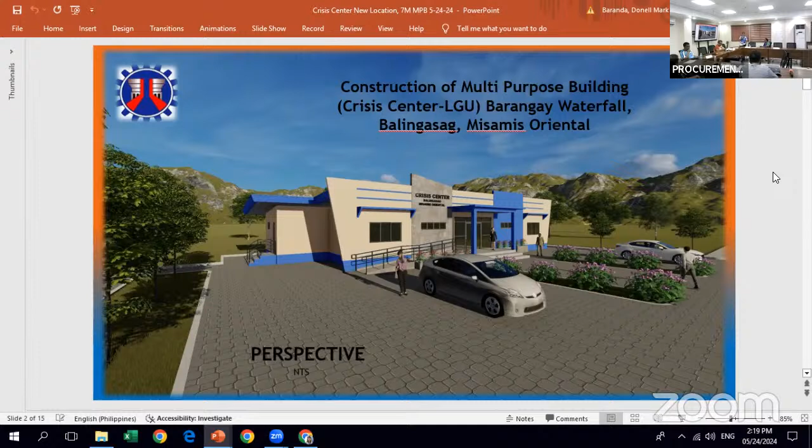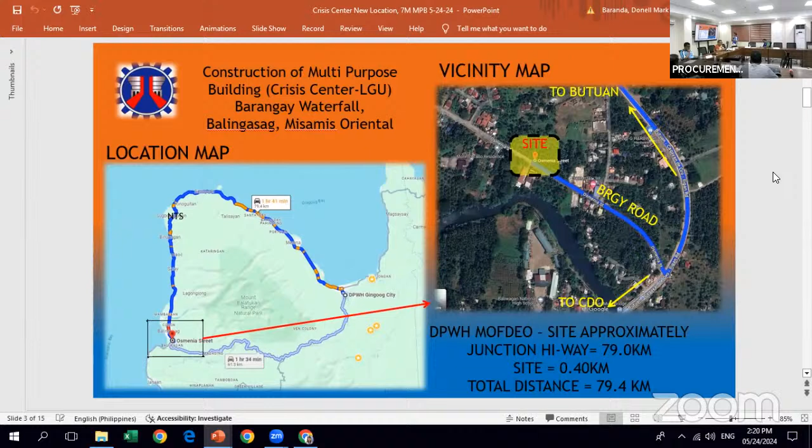From the perspective of our project, this is the location. Going to Butuan, it's on the left side. Going to CDO, it's on the right side. This is our site development plan.

This is the exact site location, near the motor pool. This picture shows the site location.

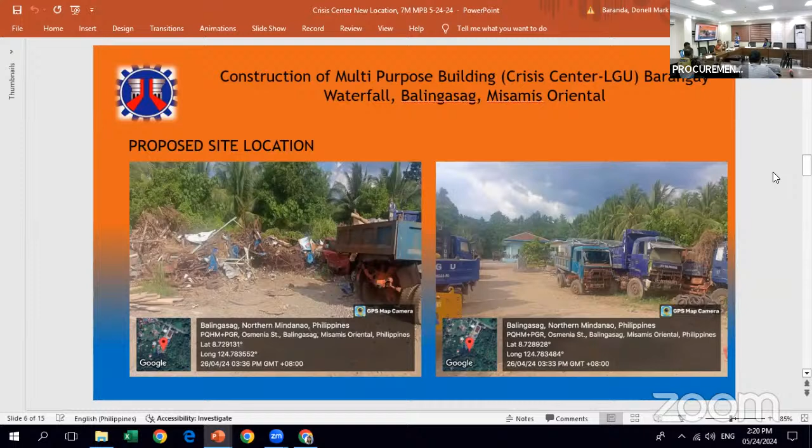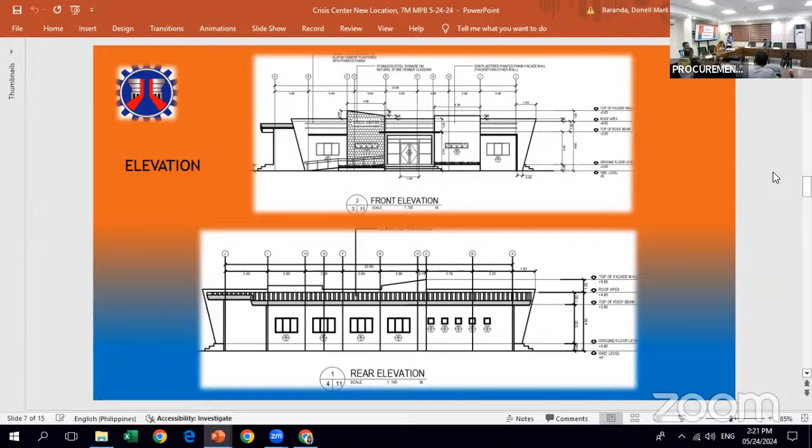Next, the front elevation and rear elevation. This is a one-story multi-purpose crisis center. Next, we have the side elevation.

For the floor plan, 23 meters long and 10 meters wide. This is the floor plan.

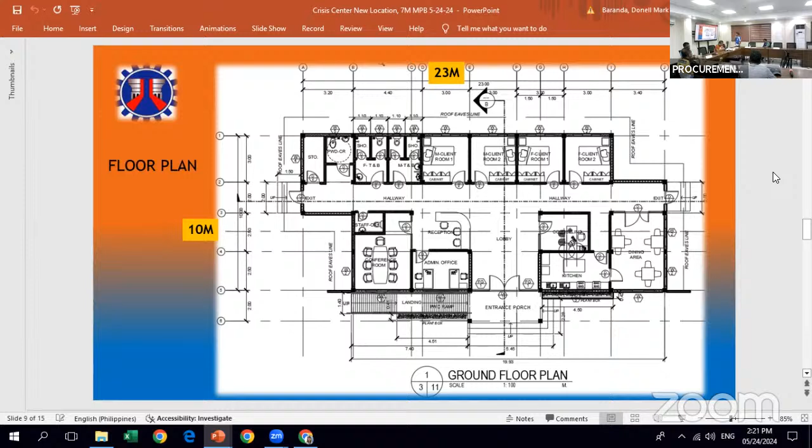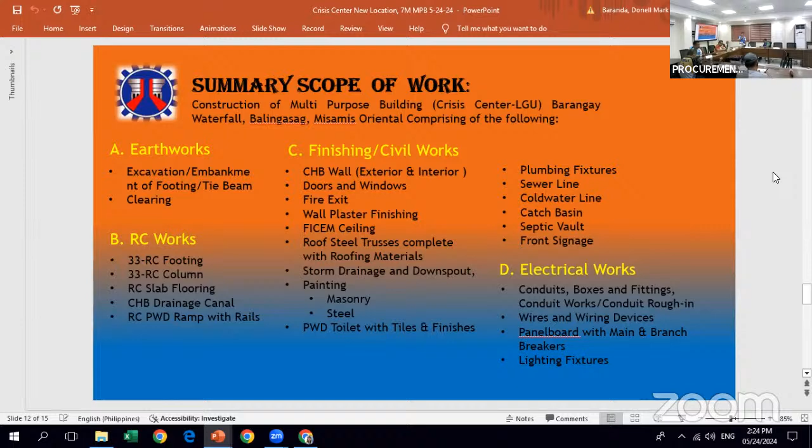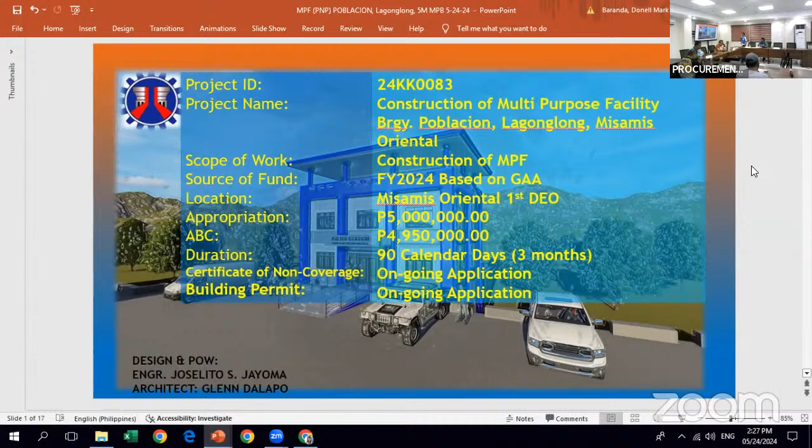Okay, we proceed to the next project, ID 24KK0083. Construction of multi-purpose facility, Barangay Poblacion, Lagonglong, Misamis Oriental. Source of fund is FY 2024, location Misamis Oriental first district engineering office. Appropriation is 5 million, ABC approved budget for the contract is 4,950,000. Duration 90 calendar days or 3 months. Certificate of non-coverage ongoing application, likewise our building permit.

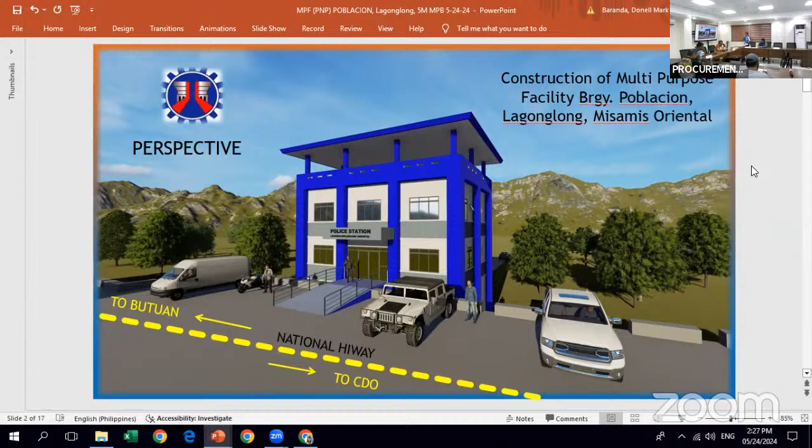So this is the perspective multi-purpose facility, Poblacion, Lagonglong, Misamis Oriental. This is the location. Going to Butuan, it's on the right side. Going to CDO, it's on the left side.

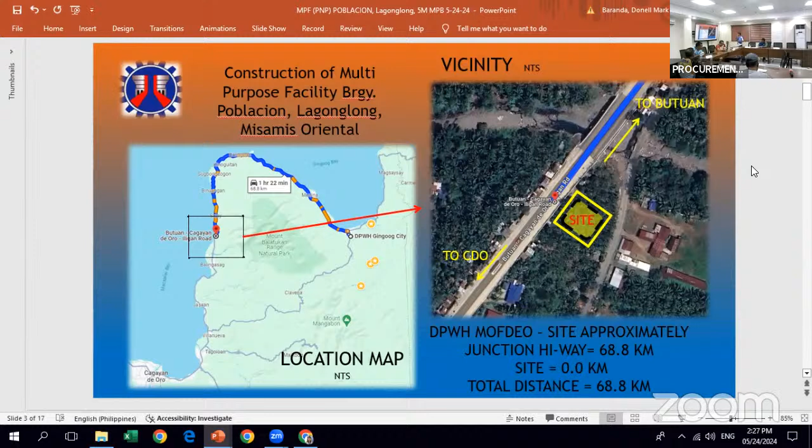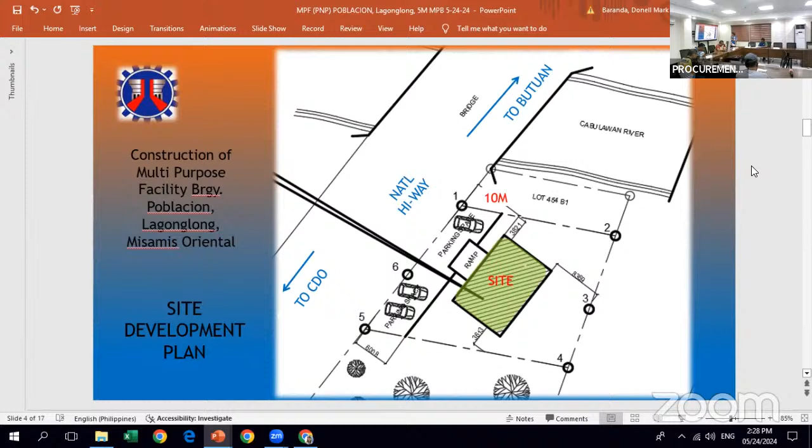So this is the site development plan. Basically our building has a setback of 10 meters from the riprap, the existing riprap. This is the site, and this is the riprap. So the site, from the riprap, has an offset of 10 meters.

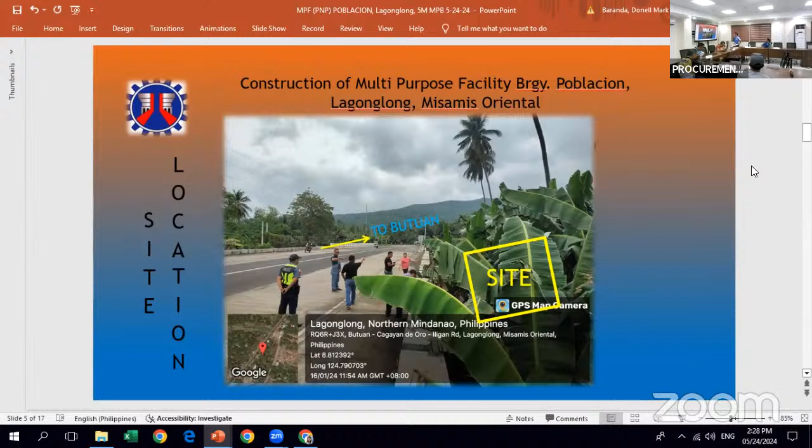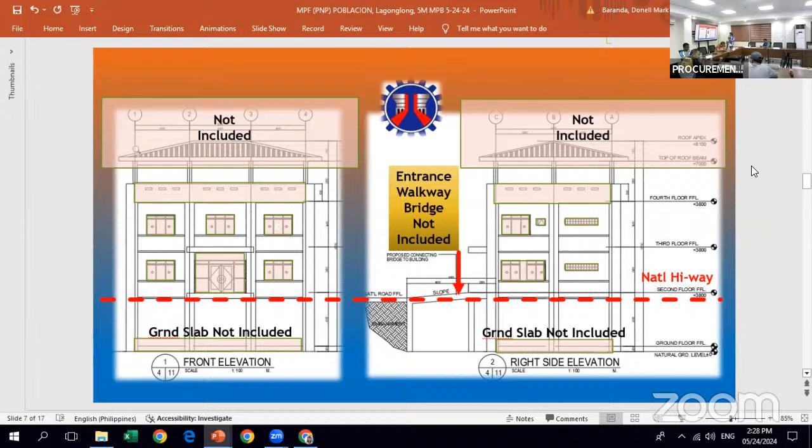For the elevation, as you can see, what's not included in our budget is the roofing. The entrance bridge is also not in the budget.

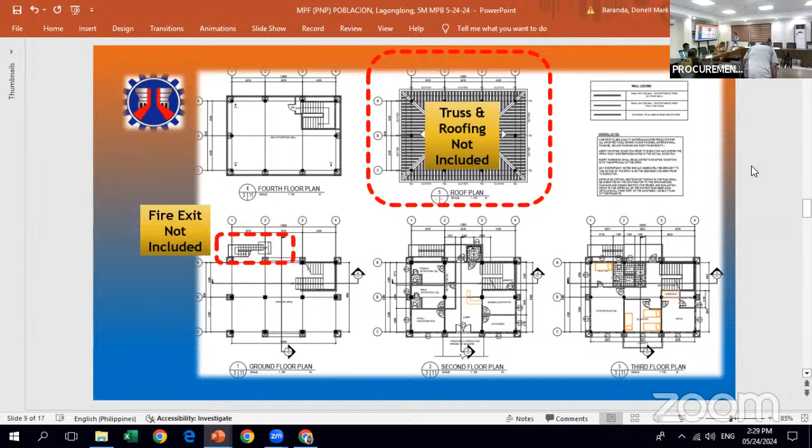Again, our floor plan, ground floor. The exit is also not included in our budget estimate. So for the second floor, third floor, up to third floor, it's covered.

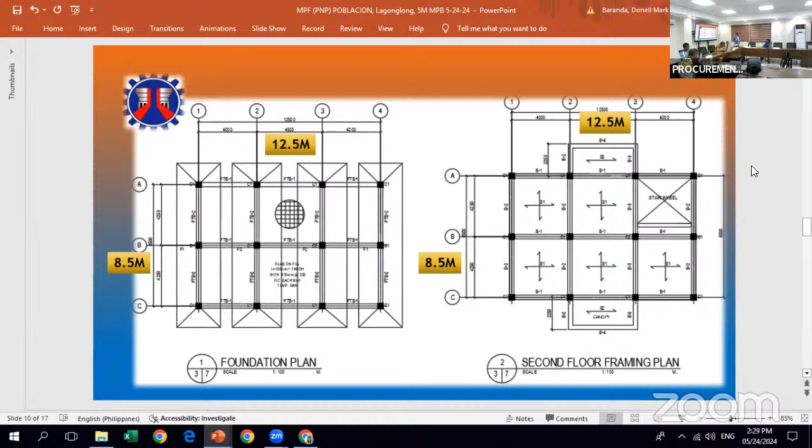So the building is 12.5 meters long and 8.5 meters wide, with 4 floors: ground floor, second floor, third floor, and fourth floor.

For the bill of quantities: provision of field office for the engineer on rental basis, permits, clearances, project billboards, occupational safety and health, mobilization and demobilization, general scaffolding, shoring and netting, structural excavation, gravel fill. For structural concrete, we have 3,000 PSI and 4,000 PSI, Class A, 28 days.

Reinforcing steel, deformed bar grade 40 and grade 60. Formworks and falseworks. We also have catch basin, sewer lines, storm drainage and downspout, septic vault, concrete CHB, plumbing fixtures for water lines, and for the ceiling, 4.5mm metal frame, 5mm cement board.

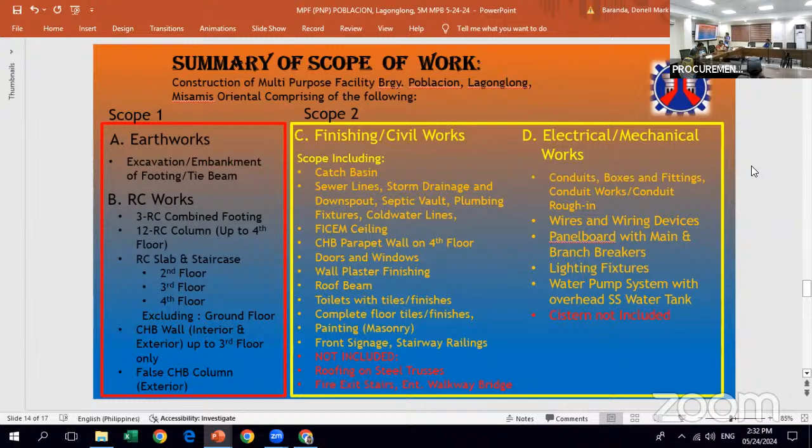So basically, the summary of the scope of work: our coverage is mainly scope 2, which is within the 5 million budget. Scope 1 was already allotted, also starting at 5 million, for a total of 10 million for one building. For scope 2, the coverage is mostly finishing, civil works, and electrical or mechanical work. So what's not included is the roofing, steel trusses, the fire exit stairs, or the entrance walkway bridge. The cistern is also not covered.

Minimum requirements: we have backhoe, dump truck, water truck, and truck-mounted crane. For minor equipment: chainsaw, plate compactor, jackhammer, one-bagger mixer, concrete vibrator, bar cutter, bar bender, cutting outfit, welding machine, and cut-off machine, for a total of 14 equipment.

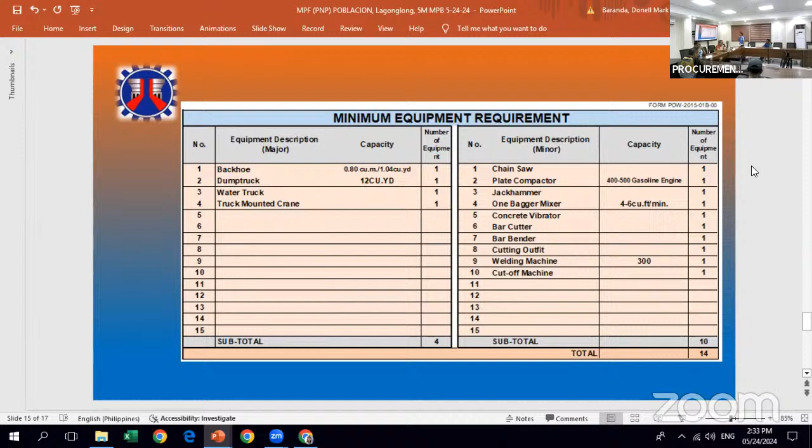For the labor requirements, we have project manager, project engineer, quality engineer, development engineer, materials engineer, laboratory technician, foreman, skilled personnel, unskilled personnel, service driver, security personnel, safety officer, and health personnel, for a total of 23 labor requirements.

Okay, thank you, sir. So we proceed for the checklist of the work for the financial method. And please start as well.

Checklist of technical and financial documents and other requirements for infrastructure project. The submission of documents: first, technical component, Class A legal documents. Letter A: PhilGEPS registration certificate, platinum membership, all pages in accordance with section 8.5.2 of the IRR.

PhilGEPS certificate of registration and membership. All bidders shall upload and maintain in the PhilGEPS account an updated file of the following Class A eligibility documents under sections 23.1 letter A and 24.1 letter A: 1. Registration certificate. 2. Mayor's business permit or its equivalent document. 3. Tax clearance. 4. PCAB license and registration. And number 5. Audited financial statements.

Section 8.5.2 of the IRR: for the purpose of updating the certificate of registration and membership, all Class A eligibility documents mentioned supporting the veracity, authenticity, and validity of the certificate shall remain current and updated. The failure of the prospective bidder to update its certificate with the current date of Class A eligibility documents shall result in the automatic suspension of the validity of its certificate until such time all expired Class A eligibility documents are updated.